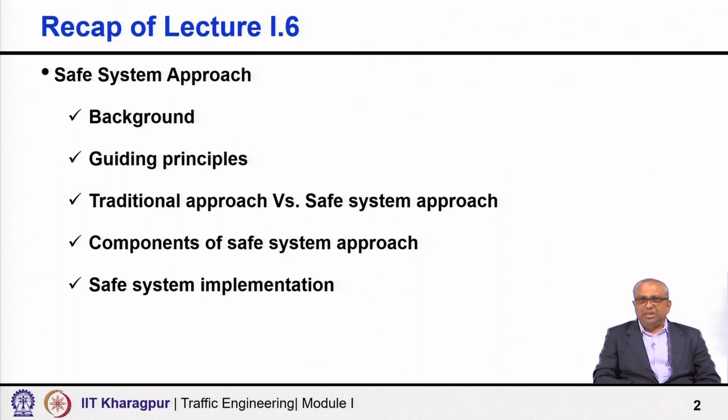With that background, today we are going to discuss road safety countermeasures, and coming to that, it may be mentioned that all over the world, in different countries, different geographical regions, different cultures, different road user environments, people have tried a number of things. Some of them in some context worked well, some of them did not work so well.

These days the World Bank and researchers and practitioners working in the area of road safety, as per the safe system approach with its basic principles, are all now highlighting the importance of following an evidence based approach. Remember that anything we are going to do as countermeasures has to be as per the safe system approach.

That means the key objective has to be to reduce and eventually eliminate fatalities as well as serious injuries leading to permanent disability. So, the key objective, reduction and eventually elimination of fatalities and serious injuries, remains unchanged. Second, why are we thinking of an evidence based approach? One primary reason is the available funding is limited.

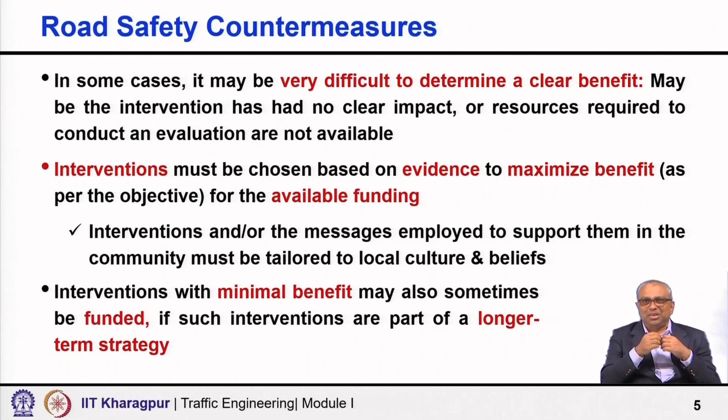Sometimes interventions even with minimal benefit may also be funded, but only in cases where such interventions are part of a longer term strategy. That means the full thing is not yet in practice. So, you might have done something which produces only minimal benefit, but because it is part of a long term strategy, it is worth it. That also is a possibility in some cases.

Now, coming to this intervention. So, this says why we should focus on an evidence-based approach, why we should try to respect this. Second, interventions: what works and what does not work.

Actually, the World Bank has documented advice on what works and what does not work in road safety, with a clear focus on interventions that can be used in low and medium income countries. Because as I said, the majority of the fatalities, the sufferers, are in low and medium income countries.

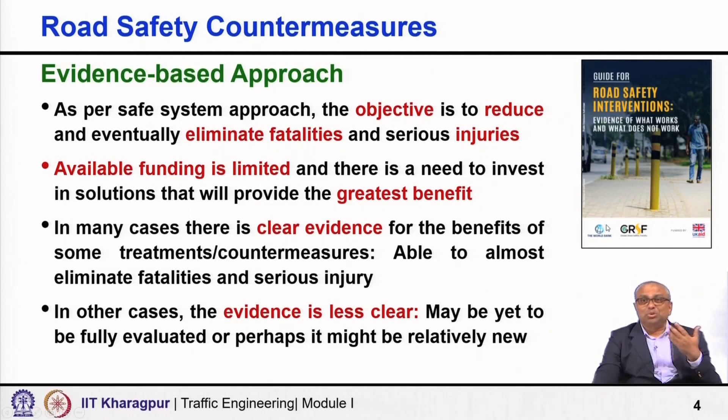So, the World Bank developed a document, as I have shown you earlier, and what I am teaching is mostly from that, because that really should be taken like a Bible. So, this is the guide, you can even download the guide, and if you are interested you can go into more detail, you can study.

So, based on the elements of the safe system approach, I have mentioned earlier what the key elements of the safe system approach are: road safety management, the umbrella one, then safe road, safe speed, safe vehicle, safe road users and post crash care. So, based on all these key elements, various interventions are described and they are classified under three groups.

First, effective. These are the interventions which are found to reduce fatalities and serious injuries. Most effective interventions are also classified within effective; some are most effective, where interventions could substantially reduce or practically eliminate these injuries, meaning fatal and serious injuries. So, the top class is the most effective group of interventions and countermeasures, followed by effective interventions which could reduce fatalities and serious injuries.

Then the last, which is the not desirable group, is the ineffective interventions, which do not reduce these injuries significantly. At least there are mixed responses or no clear evidence that they were found to be instrumental in bringing down the fatalities and serious injuries.

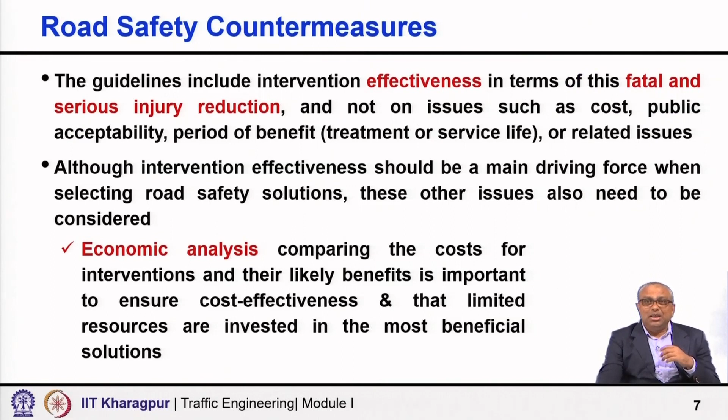Now, with this, let us come to the interventions straightaway. As I said, there are many elements: road safety management, safe road, safe speed, safe vehicle, safe road user, and post crash care. But as per the spirit of the traffic engineering course, and considering the limited time and limited number of lectures we can offer, we are focusing particularly on safe road, safe speed, and safe road user, these three major components. Others are equally important, but I am not covering them.

If you are interested to know more, please refer to this extremely valuable World Bank document, and you can get better understanding.

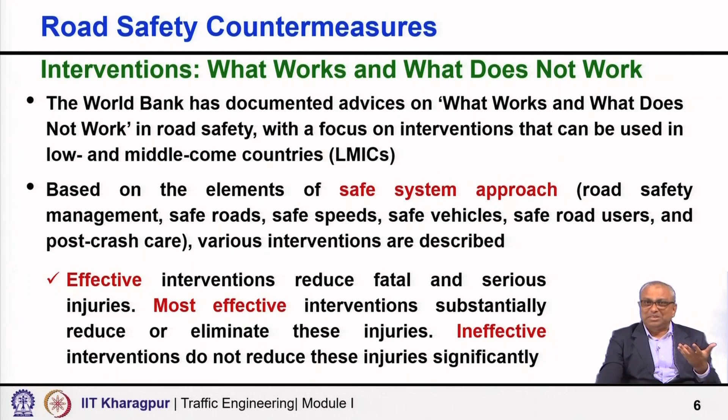First, coming to infrastructure, the highly effective interventions include integrated public transport, that means provision of organized bus, light rail, heavy rail services, and allied infrastructure facilities.

Then median segregation, which segregates vehicles travelling in opposite directions - very important, and one of the key motivations for converting two-lane highways into multi-lane highways with divided carriageway or median.

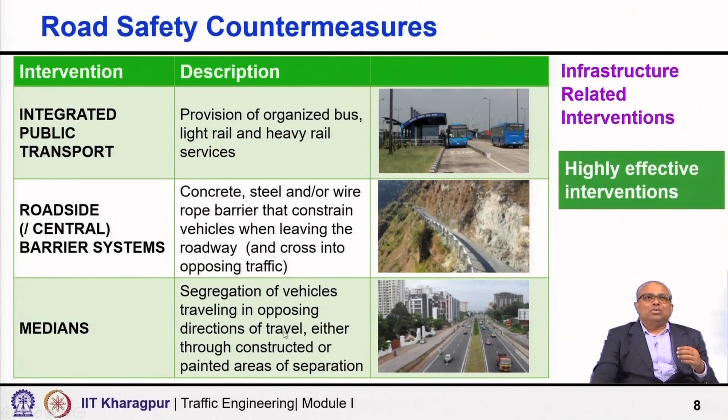Similarly, roundabouts are intersection control measures implemented to reduce speed, control the angle of impact, and reduce conflict points and types of conflicts. Such things again are highly effective.

Grade separators at intersections - yes, capital intensive, it requires investment to develop such infrastructure, but again they fall under the highly effective intervention category.

Then anything you do to reduce risk exposure at intersections, for example physically preventing cross traffic turn movements at intersections, or closing low quality intersections and redirecting traffic to high quality facilities.

You can see here, we are not allowing traffic coming from a minor road to take a right turn - that is prohibited, or it is blocked one way. You can use different types of infrastructure, but basically we are discouraging right turns.

I've shown some similar features earlier in a different context, where we are not allowing right turns to happen.

So vehicles can take a left turn instead, and where a wide median is available, a proper storage lane can be provided for a U-turn. The vehicle will come and accordingly may take a left turn or go straight.

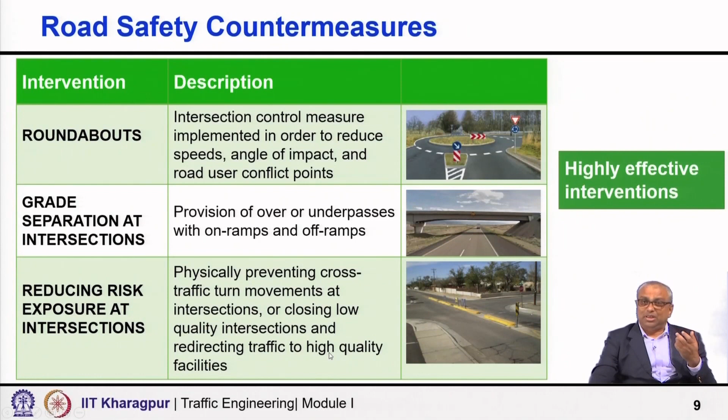Pedestrian footpaths show clear benefit - highly effective. In urban India, we face a real challenge here. In many cases the pedestrian footpath is either not available, or it exists but suffers from encroachment, discontinuity, poor condition, and is not usable or attractive for pedestrians.

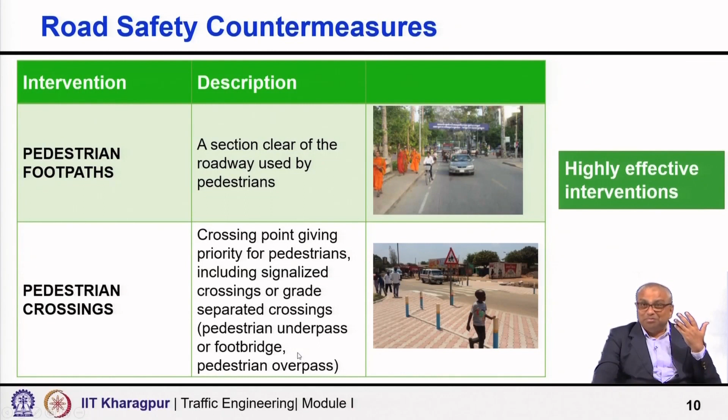We must learn from such evidence that pedestrian footpaths and safe pedestrian crossing facilities both come under highly effective interventions. We must promote and encourage good pedestrian footpaths and crossing facilities, because they are highly effective and can significantly reduce road fatalities and serious injuries.

Coming to the next level - not highly effective, but still effective interventions - for example, separated bicycle facilities, one photograph is shown. There are many other forms of bicycle facilities as well.

Then separated motorcycle facilities, in some cases not very common in India, but increasingly bicycle facilities are gaining more popularity and acceptance in urban India, which is a very positive sign from a sustainability point of view. It is the responsibility of the traffic engineer and related authorities to ensure that safety is in no way compromised.

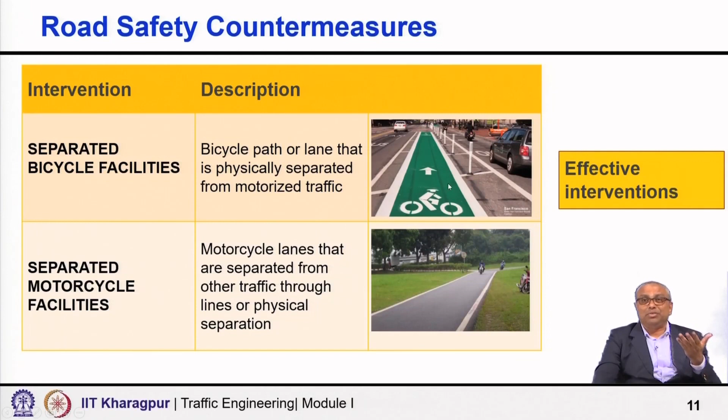So these are effective interventions. Other intersection improvements, such as installation of traffic signals and provision of turning lanes, also fall under effective interventions. Signs and line marking, and audio tactile line marking, also come under effective solutions.

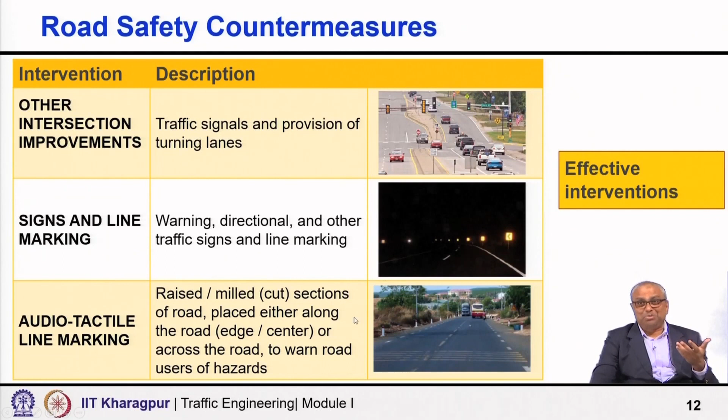One example of an intervention that is not effective is improving surface quality on poor quality roads without additional infrastructure improvement - that means only the surface condition is improved. So obviously, what will happen?

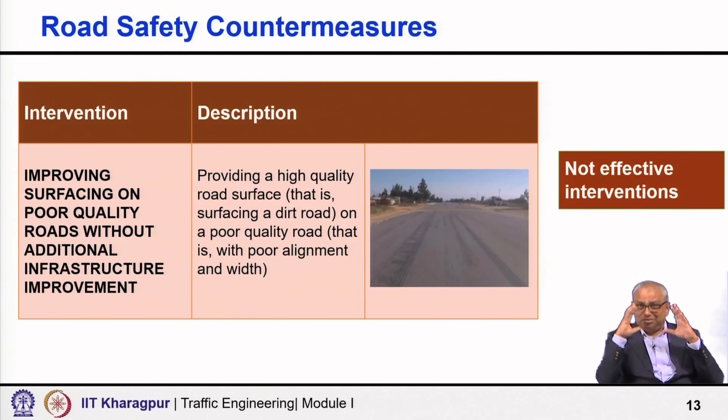Speed will increase because motorized vehicle speed will increase, but you did not look at the other infrastructure improvements. For example, pedestrian facilities, slow moving vehicles, how they will travel on the road, no separate facility, no safe crossing facility for bicyclists, pedestrians and others. So without any other additional infrastructure, simply widening the road, some cases in India also we have done such things, just resurfacing, making good surface condition without looking at the overall infrastructure improvement in a holistic manner.

Then going to the next one, safe speed related interventions. Obviously, the highly effective interventions may include traffic calming, humps and other kinds of speed control measures, very common things. So reducing the speed of traffic, especially in areas of higher risk where vulnerable road users are present, and therefore reducing road fatality and severity of crashes.

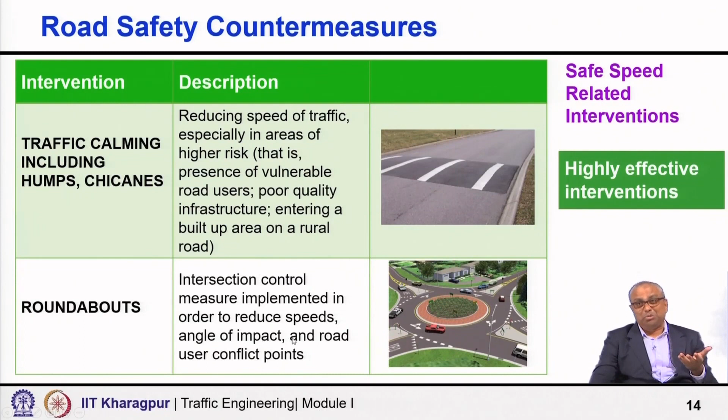Roundabouts, again as I have told earlier, it is useful, but as a part of safe speed also it is useful, because intersection control measures are implemented in order to reduce speed, along with angle of impact and road user conflict points. So for reducing speed also, these roundabouts are highly effective.

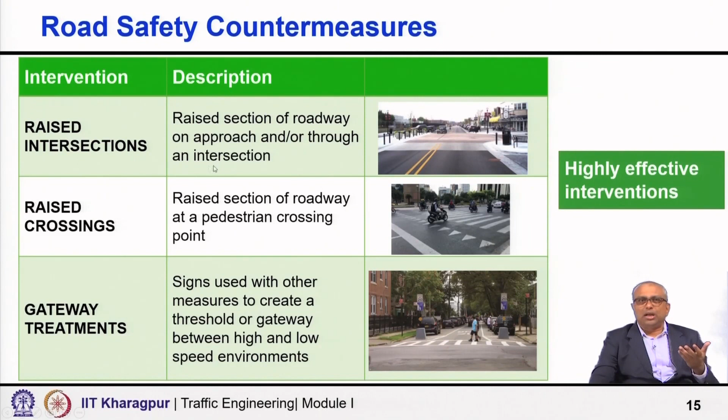And what was found, the before crash treatment, before putting this flexible pole, during 2013 to 15 the data was collected, and also the after crash treatment data was collected from 17 to 19. Surprisingly, it was found that 100% reduction in crashes involving buses could be achieved, 25% reduction in heavy commercial vehicle or light commercial vehicle, and 50% reduction in two-wheeler crashes.

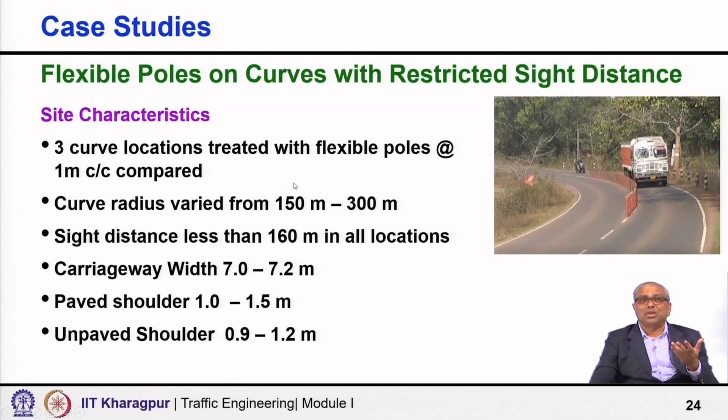So this was really use of flexible poles on curves with restricted sight distance, really found to be effective in reducing road fatalities and road crashes. Additional statistical tests were also done to see whether the change in speed or change in the number of crashes were statistically significant or not. Those were all done, I have not reported it here.

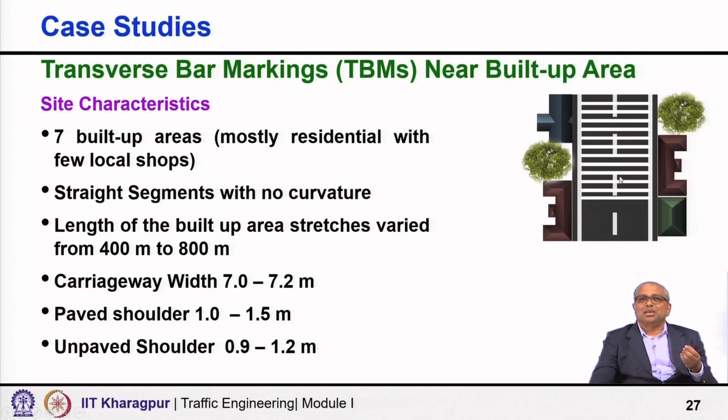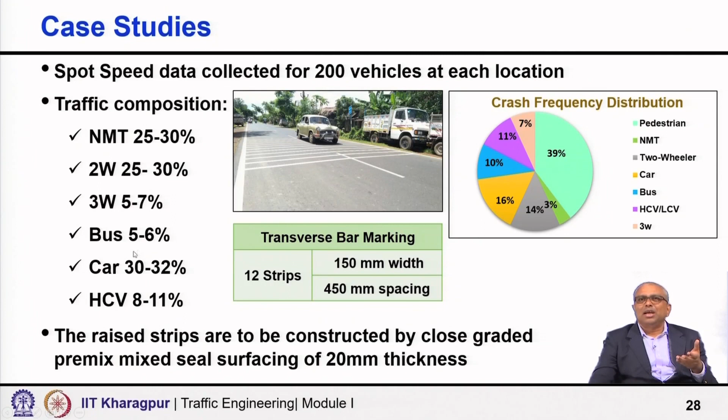Then the second case study is related to transverse bar marking, TBMs, near built up areas. These are thermoplastic, plain, multiple layers. So as I have said, 12 strips were used, 150 mm width and 450 mm spacing. Here it shows 7 built up areas were taken, what was the length, carriageway width, traffic situation, and the crash frequency distribution, all are shown.

Here also the before treatment crash data from 13 to 15 and after treatment crash data from 17 to 19 were collected and compared, and these are the benefits. There were clear benefits at least from these case studies, and all these benefits were compared, as usual, wherever necessary to check the validity or acceptability of results based on statistical tests. All those were done. So these were two.

Like that, there are many case studies available and we can benefit from such case studies. Such case studies form the basis for knowing what kind of treatments or countermeasures worked in nearly all cases, and which things probably did not work so well or did not produce good results uniformly across all sites or locations. These were only two small examples. There are plenty of such things available.

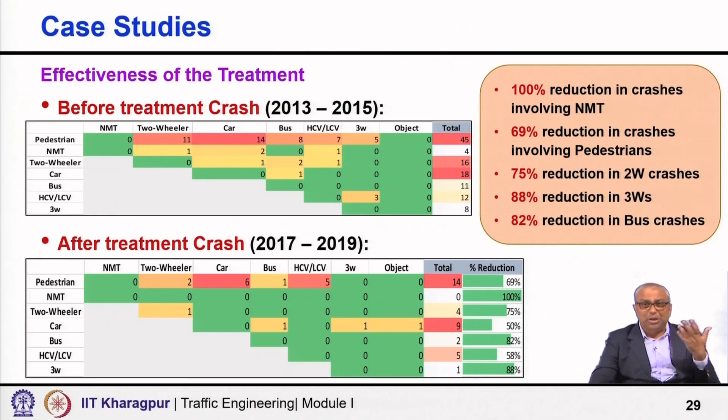So what we discussed today is basically road safety countermeasures: why evidence based approach, what is evidence based approach, then interventions, what works, what does not work, and under different categories a number of measures which are highly effective or effective with respect to safe infrastructure, speed limit or speed management, and also safe road users. We also discussed two small case studies: one on use of flexible poles on curves with restricted sight distance, and the other on use of transverse bar marking near built up areas.